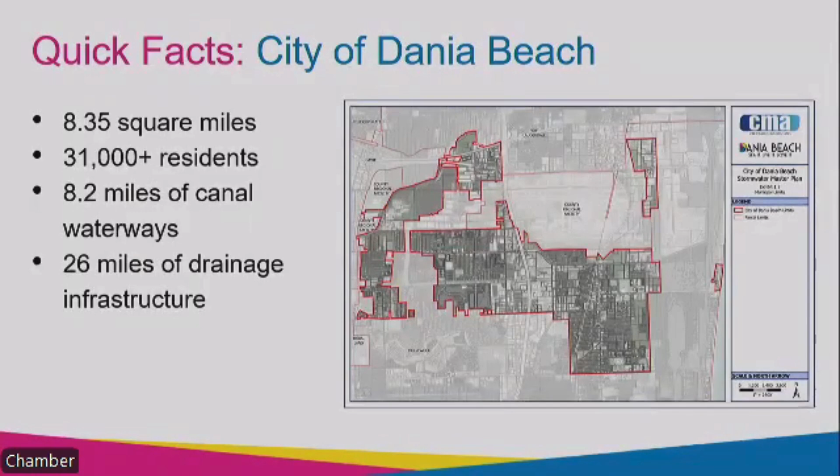So basically, how does stormwater work? We have rainfall that occurs. We'd ideally want it in a swale or retention area for storage. That's where we want the water stored, off of the roadways into the swales and storage areas that can infiltrate and percolate back down into the groundwater. From there, as it overtops those swales, it goes into the drainage inlets that ultimately connect to all of those canals we just talked about.

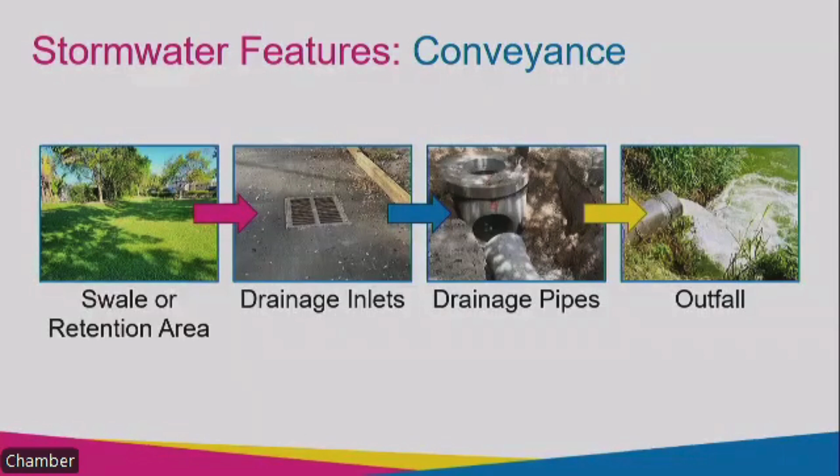So what are the stormwater constraints here for the city? We have aging infrastructure. This is the oldest city here in Broward County, so we have a lot of older pipes that aren't efficiently and effectively working, that could be collapsed, have debris in them, or just be really undersized. We also have low surface elevation—your roadways and how low-lying they are compared to canal elevations and groundwater elevations. The lower the surface, the less we can store. We can't create those swales and retention areas very deep because of the high groundwater table and low surface elevation. That's also a constraint, and what improvements we can do is limited by that low surface elevation.

And we also have sea level rise, I'm sure everyone's heard of. Because of all of those canal systems and how everything is interconnected tidally, as the high tide occurs, sea levels rise higher and could overtop some of the seawalls. So we're also limited on what we can discharge and how we can discharge to those canals when sea levels are higher.

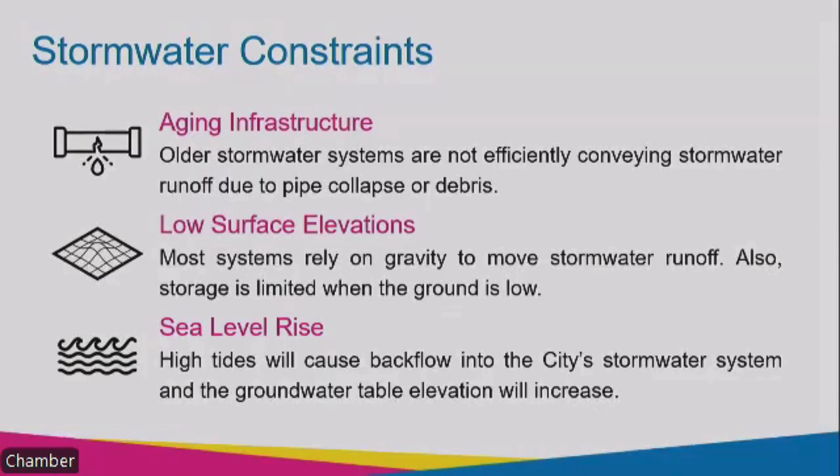So these are some constraints we have that we're aware of, that we're trying to address in some of these stormwater improvements that we're going to recommend.

So first off, we did a model. This is a stormwater model. Some of the steps that we took to prepare the model, we had to identify the topographic area.

This is basically just a snippet of one portion of the city that we're going to demonstrate in some of these exhibits, with US 1 on the left, Griffin to the north, Stirling to the south. But ultimately, this is the surface.

You see the higher areas, US 1, in that darker brown area. And then as you get to a lower green color, that's the lower lying elevation. So all of the surface topography is imported into the model.

And then we also have on the image to the right all of your pipe and how the system is interconnected for the drainage system. We already have a lot of that city-owned infrastructure, a lot of inlets, a lot of pipes, all the outfalls. So all of that is also imported into the model to see how the stormwater runoff is connected between all of the adjacent neighborhoods.

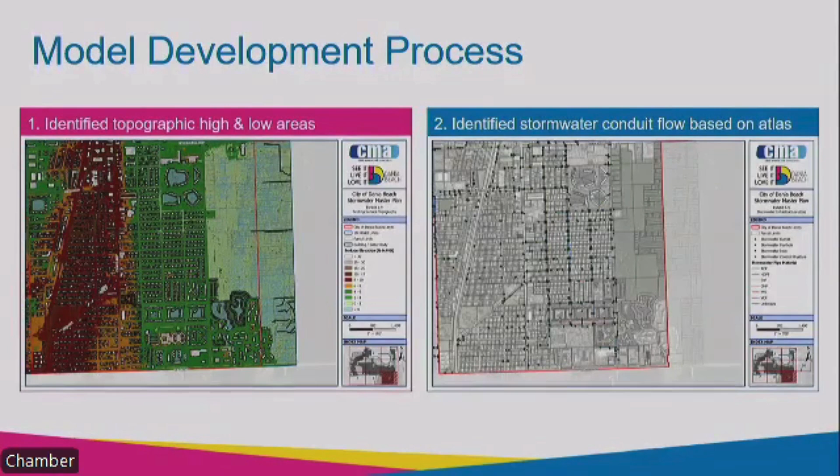So next we have image number 3. We delineate basins. Ultimately how all of those neighborhoods are connected are individual basins. So imagine its own little bowl, if you will. All of the rainfall that occurs in that basin will stay in that basin and only connect via pipes or over ground, over like a roadway per se.

So the image to the right is the nodal diagram, what's created in the model. You'll see a lot of little lines - those are all the links of how each of these basins are connected. We'll have pipe interconnection and we'll have the overland flow, basically a roadway, and all of those and how all of these basins are interconnected with all of these different links. Ultimately, that's the creation of a stormwater model.

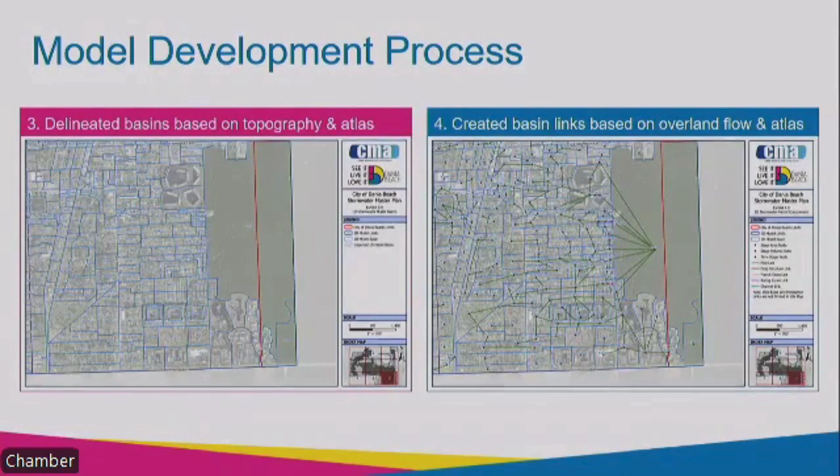So if I go back to this other image here, these are the different categories of how we prioritize that - the different vulnerability, is what we're calling it. So those red basins are the highest, showing exceeding 1 foot of flooding from a 10-year storm event. We're throwing 8 inches on it, but because it's the lowest lying area, there's actually more than 1 foot of flooding on those roadways.

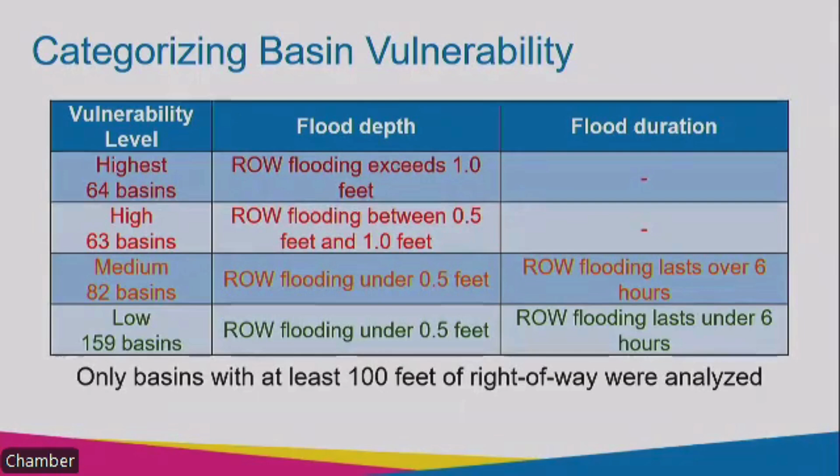It's also important to note, we only looked at city-owned right-of-way. So if it was county or state-owned or privately owned, we didn't analyze those basins and roadways under this analysis, because we're looking to see how we can implement stormwater projects with city funds and reduce the flooding in city-owned right-of-ways.

So knowing those different categories, the red basins are the highest, the orange are the highs. Those are the ones we tried to basically focus on - we need to make improvements, and those are the higher ranked vulnerability basins.

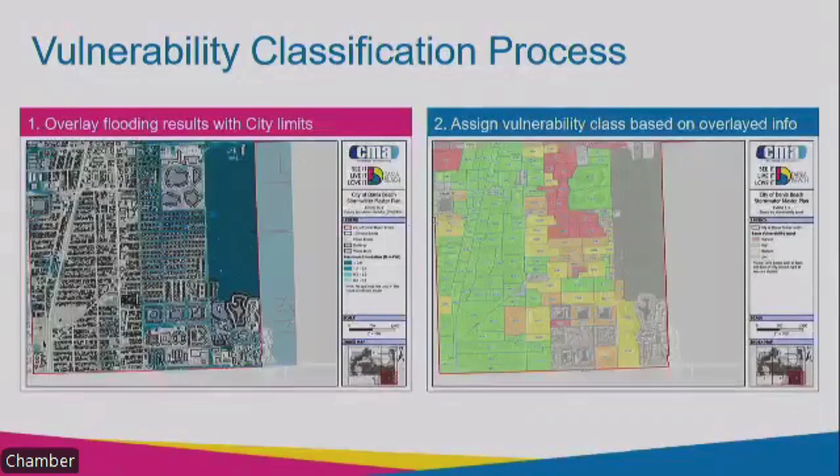So ultimately, this next step - this is kind of what we presented in the last presentation. We kind of got to this point. Now we're going to identify what capital improvement projects, what we can do to improve these 10 areas.

I also wanted to preface that it doesn't mean if you are not in these study areas that nothing's going to happen in your neighborhood. This is really just a start, a guide for the city. A lot of funding can come from having a stormwater master plan, so this is really just that first step to help the city get the funding and guide them on where to start working on some stormwater improvements. So if you're outside of this area, still be vocal, still let the city know your concerns. This is really based purely on the model results - streets that are very long, over 100 feet of roadway, flood over a foot, got identified with a higher priority.

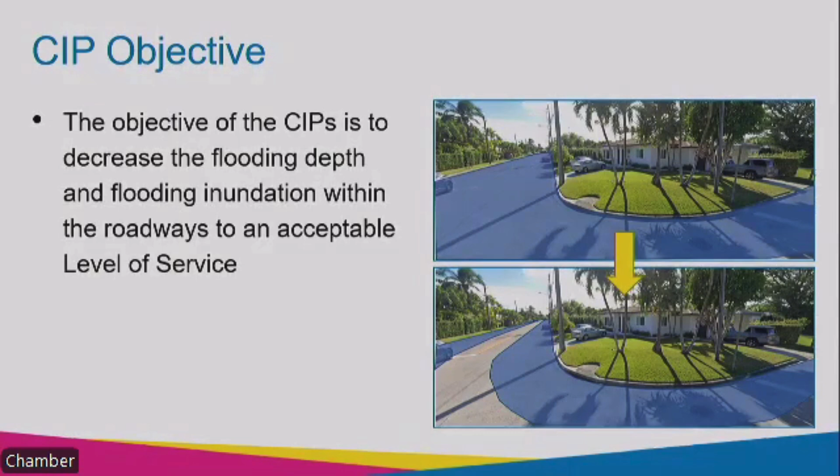Okay, so now that we know those are the study areas we want to look at, we're trying to analyze and identify what improvements can help the flooding in those areas. So ultimately, what is our objective? We want to decrease the flooding depth as well as the duration. So maybe I still have 6 inches of flooding, but instead of it flooding for 24 hours, it's only flooding for 2 hours. So a goal in looking at these different alternatives is getting the depth of flooding and duration to a more acceptable level of service.

Next, we looked at all of those different study areas, and we tried to identify a score for each to be able to rank all 10 of them. We looked at the depth over the right-of-way, the duration - how long it's flooding in that right-of-way and roadway - and then the length, so is it only flooded for 10 feet or is it flooded for 1,000 feet. That also was a component in this formula to score these different capital improvement projects. We also looked at observations the city gave us on flooding frequency, which helped guide us with that formula. Ultimately, this became the ranking of those 10 study areas.

So next, these are the different alternatives we looked at - let's say adding a new pipe, adding a pump station. I'm going to briefly walk through each of these things that we threw into the model for each of these 10 study areas, and at the end we identified what was the best result. Because ultimately, we want to make sure we invest the money correctly - we want to make sure we don't put in a pump station if it doesn't provide the best reduction of flooding.

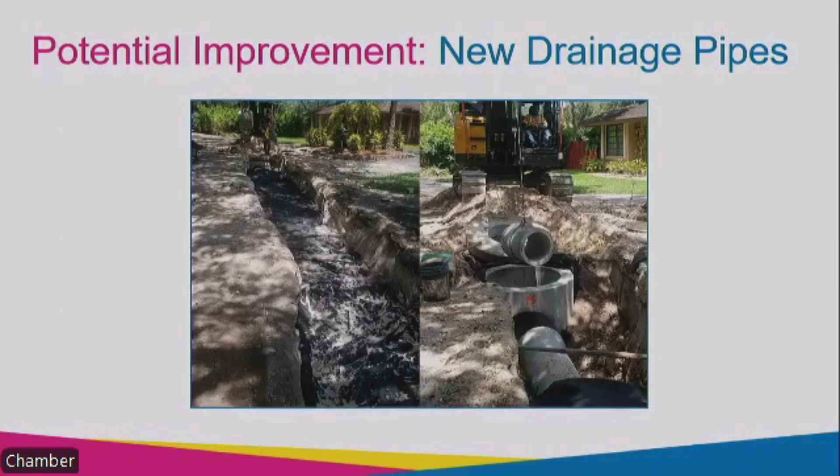So some of the things we looked at: a new drainage pipe. As we talked about in the beginning, the water's falling on the road, and we want to make sure we can guide it and direct it out to those canals, so piping is the best way to do that. We also looked at an exfiltration trench as a method - we'd have a perforated pipe that lets the water seep back down into the groundwater. This is a good candidate when our groundwater is a little bit lower than our pipe elevation.

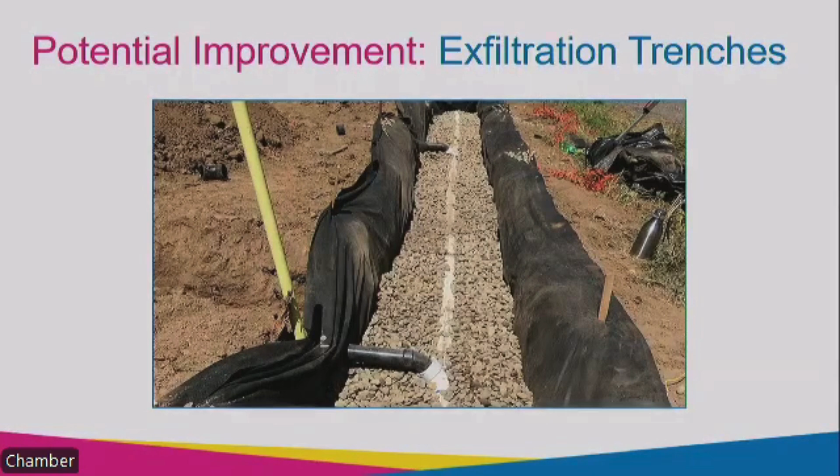We looked at backflow preventers. We talked about the canal and sea level rise. We want to make sure that as the canal is rising, water doesn't come back into our roadway. These items are called backflow preventers, installed at the outfall to make sure water doesn't come back up into the roadway.

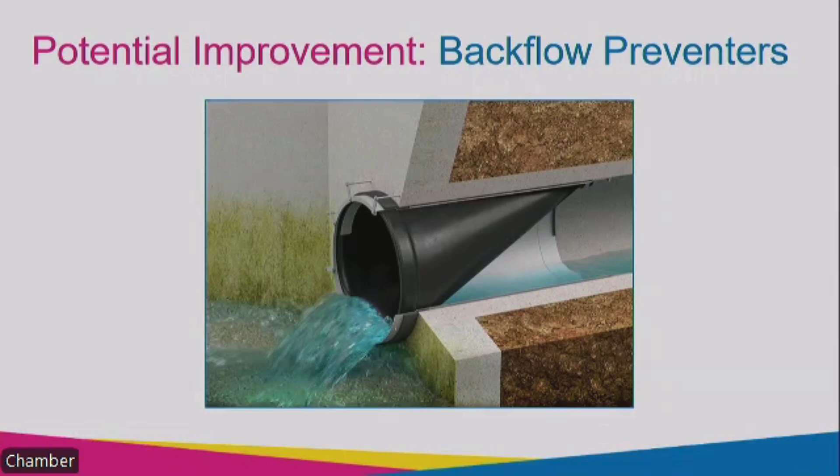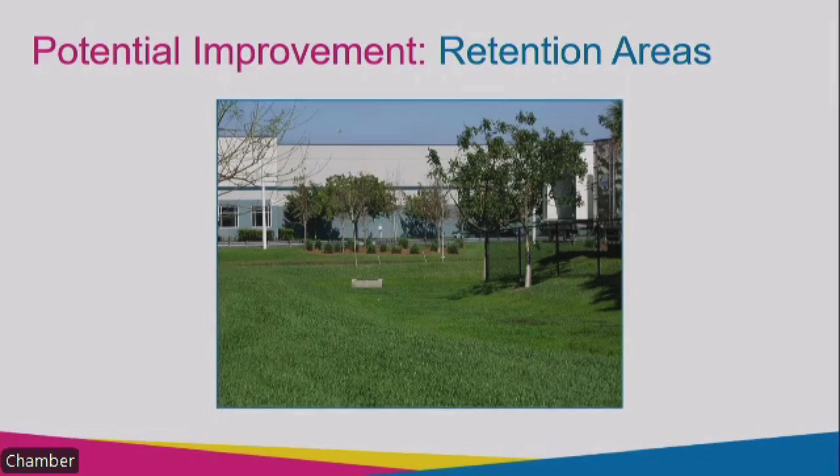The city's actually already been implementing and installing a lot of these at the outfalls, so we're including those in our model as a preferred option. We also talked about the benefit of retention areas and swales. If we can provide additional storage in some of these neighborhoods, that water can be stored and not all of it has to go out to the canals. So we recommended and analyzed some retention areas to provide more storage, water quality, help percolate back into groundwater, and once it fills up, we can discharge it to the canals.

Questions during, or should I wait till the end? You can go ahead.

I live at 325 11th Terrace, right across from Olson School. I don't know if you know that we have swales in the back of our condos. Are you familiar with those? Not off the top of my head, I'd have to look at a map. Okay, no problem, then I'll let it go.

Swales are very important because they provide additional storage. A lot of times residents don't like them—they fill up, get mosquitoes, and are hard to mow. But if we can capture that storage and runoff instead of everything being paved and all that water going to a canal, and try to percolate it back into the groundwater and provide additional storage before we run it off, that's less discharge to the canal. It's providing water quality. So there are definitely a lot of benefits to swales.

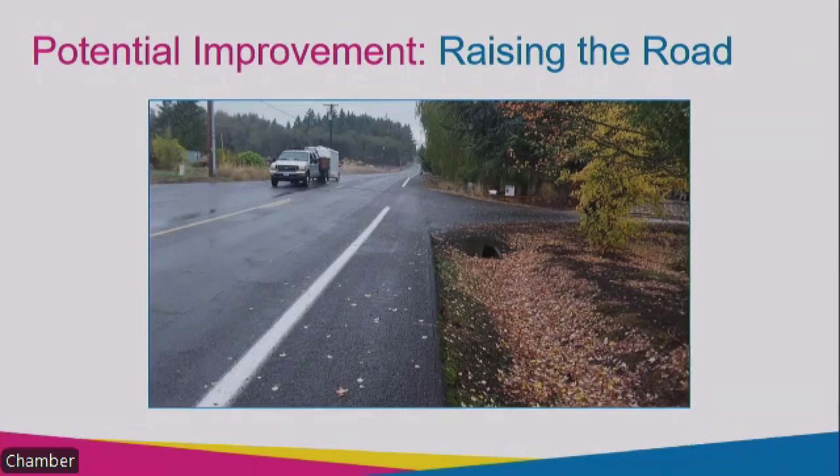Okay, let me finish wrapping this up, and then we can take more questions.

Pump stations is a big one, because as sea level rise occurs, we have those pipes to the canals, but if the sea level's high and our roadway's low, there's nowhere for the water to go. It's not going to go out unless it's pumped. It's got to be forced out.

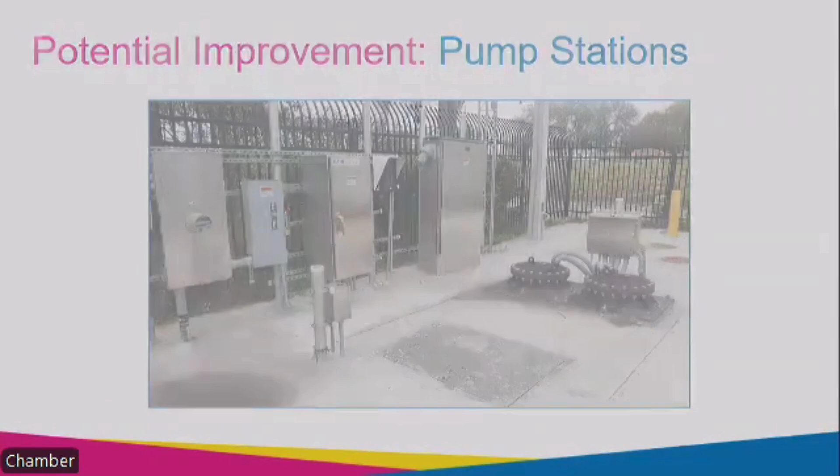So pump stations was another alternative we looked at. Drainage wells - this is a way to pump the water back down into the groundwater. This was a good candidate in certain locations.

And then raising the seawall. Obviously if the sea level rise gets so high that it's overtopping the seawall, no matter what size pump station you put in, the water is just going to keep overtopping the seawall. So there are some locations where we would recommend raising the seawalls. That's going to be a long-term phase, because a lot of the seawalls in these areas are owned by private residents. So we're looking at policies and codes and trying to look for grants to help the residents in raising those seawalls. That's definitely an alternative that we looked at.

Okay, so our first CIP area - this is off of Griffin Road out west, just before 441. This is one of the neighborhoods where we grouped these basins together, and we looked at what we're calling CIPs, capital improvement projects. So we're recommending - if you could kind of see, I know it's a little hard to see - the green dots and lines are existing infrastructure, and the purplish pink color is all proposed.

Also, on 34th Terrace, there's an upcoming project, so we did include that in the model as existing infrastructure, just because it's planned in the near future. But ultimately, this is what we're proposing: gravity pipes. That backflow preventer is what we talked about at the outfall - we don't want the water to come back up into the city roads.

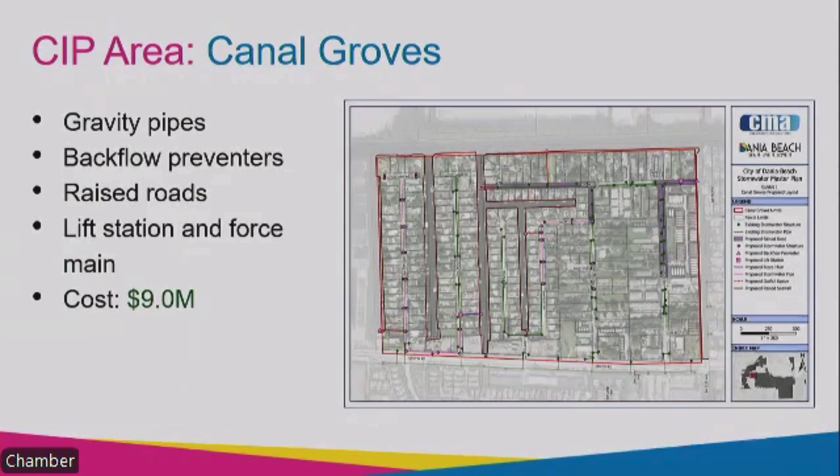Number 2, this is south of Griffin - between south of Griffin and east of State Road 7. You have Southwest 40th over there, and Lake George at the top. There are some projects going on here that the city has. So we're just trying to interconnect those existing projects and really trying to get everything to flow into Lake George to discharge out of the residential neighborhoods here.

Again, gravity pipes, those backflow preventers, exfiltration trench is a good candidate in some of those - that's where the pipe will be perforated and allow the water to get back into the groundwater. Again, the lift stations - this one's just over $15 million, and the price tag obviously is bigger the bigger the size of the area we need to cover. We need to pipe a lot of this, all the city right of way, and get it to the outfall, which would be Lake George, which is interconnected under Griffin Road to the Dania Cutoff Canal.

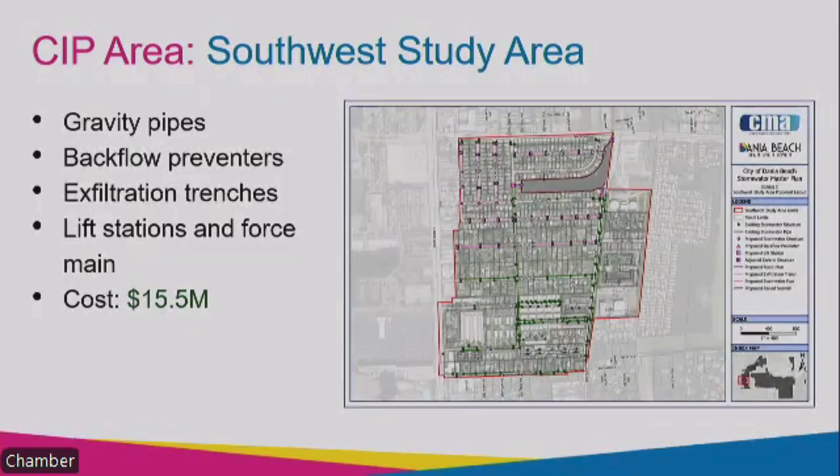Number 3, we have up to the north, more off of 84 and Ravenswood. We have a couple roadways here that have some heavy flooding and really no outlet. There's no interconnectivity for where it can go. It's more industrial over in this area, but it was categorized high just because of that length of roadway and depth of flooding, so this was still categorized as a study area. So we have gravity pipes, raised roads, and again those pump stations. This one's costing 7.2 million.

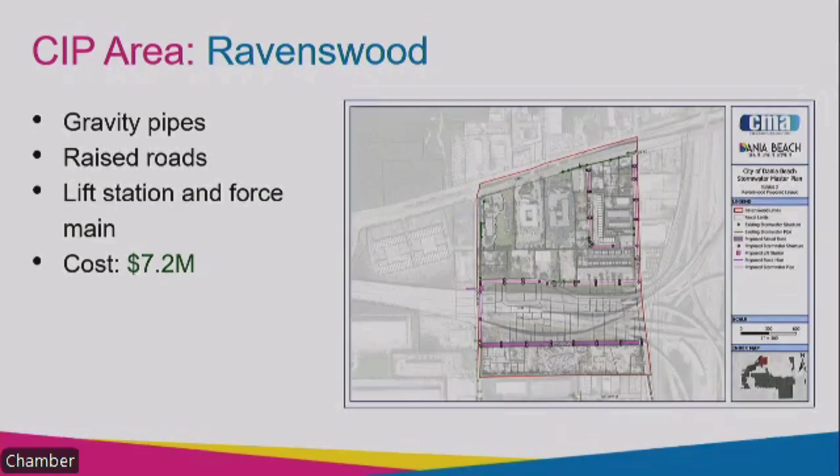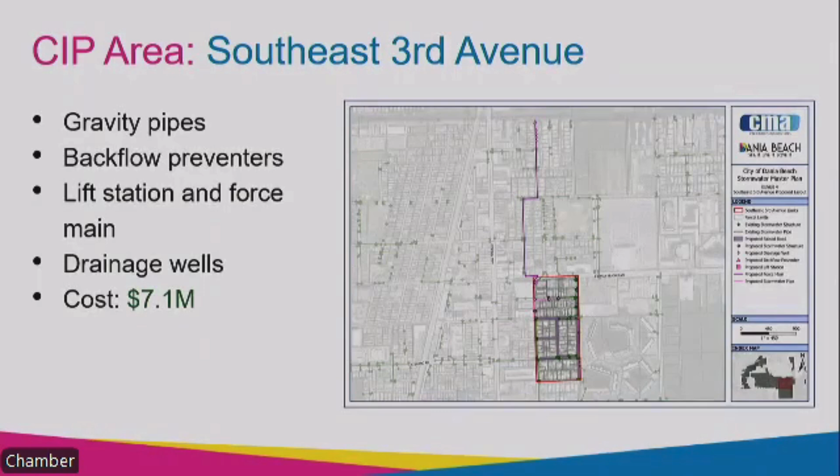This one's Southeast 3rd Avenue, south of Dania Beach Boulevard. That rectangle area you see is south of Dania Beach Boulevard and east of US 1. This is adjacent to another city project, the Southeast Neighborhood Project, so this is just north of it. We're trying to collect it all. There's really no canal system nearby, so our plan would be to pump everything north to the Dania Cutoff Canal, collect all of that water there, and discharge it to the canal. We have gravity pipes, backflow preventers, a lift station, and drainage wells. This one's 7 million.

This one we're calling College Homesites. Towards the bottom, the east-west corridor is Sterling Road, and the corridor all the way to the right is US 1, so that's where this one's located. This one's also kind of like a bowl, so all of this water really doesn't have anywhere to go. US 1 is a little higher, and then you have the canal to the west there. So we really just need to capture all of that and pump everything to the canal. We're recommending gravity pipes, backflow preventers, raised roads. This one will have some FDOT connection onto Sterling Road, again those pump stations and drainage wells.

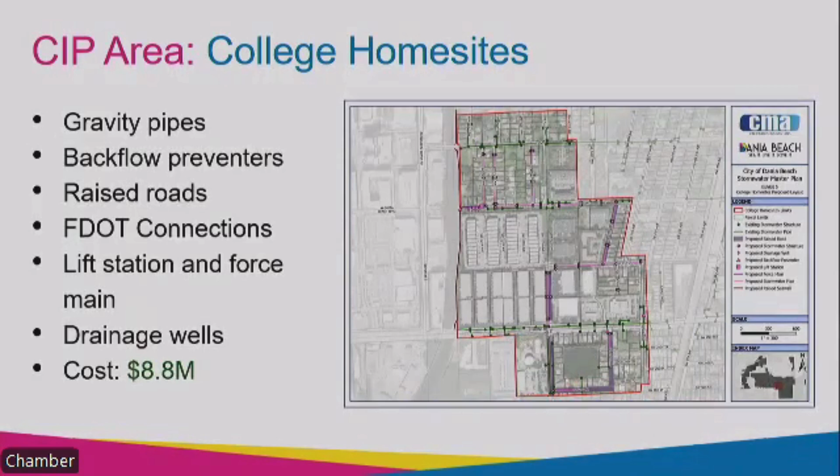Davis Isles is north of Griffin, almost all the way to 441, just east of 441. This one is a smaller one, but it still observes a lot of flooding, so it's still triggered in our formula. We recommend additional gravity pipes, backflow preventers, and again we need to pump that water out. This is just low lying, so no matter how many big pipes we have, the canal water is going to be too high when the sea level rise occurs, and the water can't get out. So we need to add those pump stations. This one's costing 4 million.

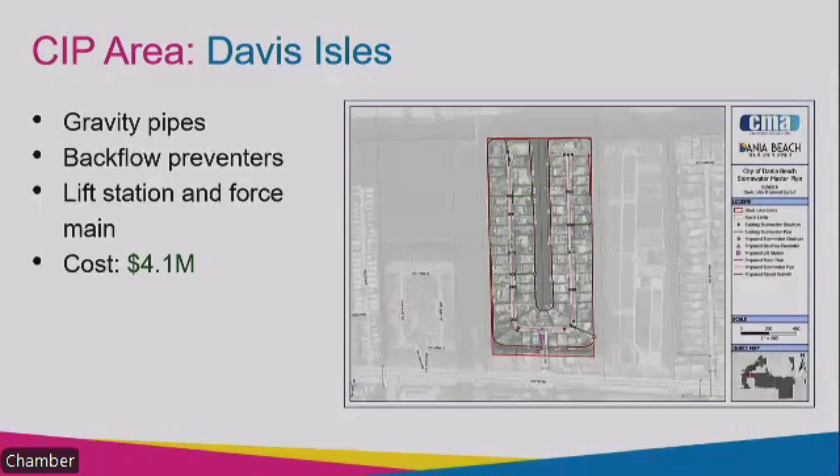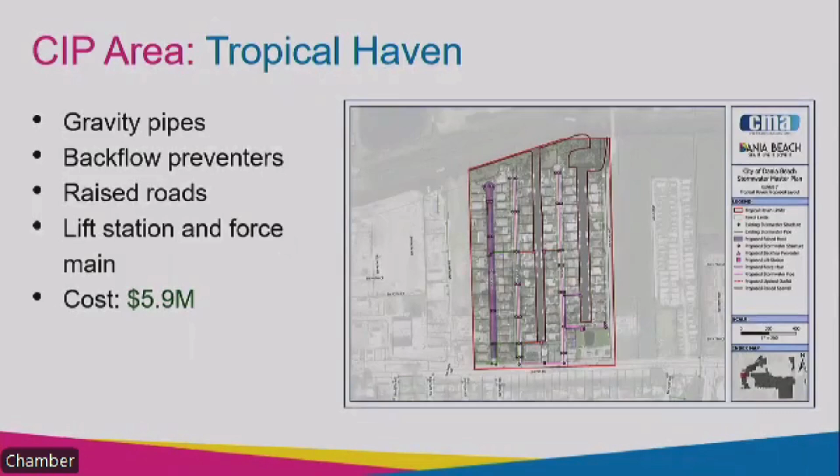Next one, Royal Palm Vista. This one is adjacent to Dania Beach Boulevard—actually just adjacent to the prior one we just looked at, just to the east of it. So again, very similar scenario. We don't want to flood Dania Beach Boulevard, so we need to pump that water north out of this neighborhood. So additional pipe interconnections, backflow preventers, raised roads, pump stations, and drainage wells, just under 9 million here.

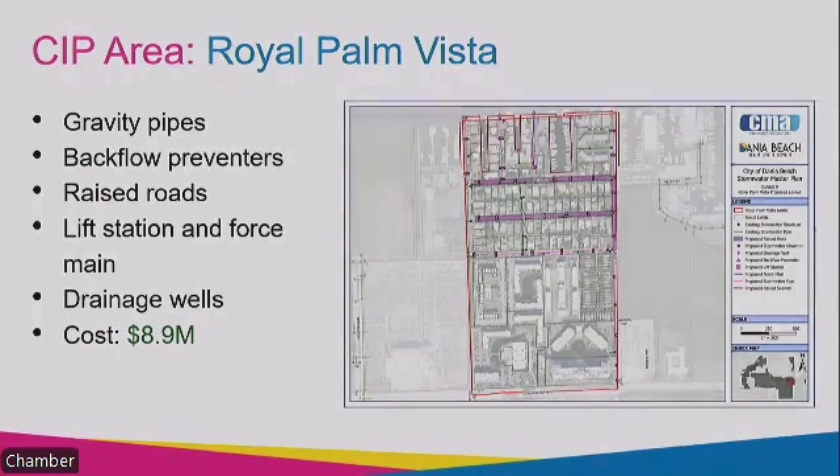And I think the last one on our list, Melaleuca Gardens. So this one is just north. You see the Dania Beach, the Dania Cutoff Canal kind of on the bottom there, curving, and we have Griffin Road to the north. So again, lots of little finger inlets, so we really have all these little bowls, if you will, for all these basins. We really need to get the water collected and pump it out. So again, just the gravity pipes, the backflow preventers, exfiltration trench where we can, where the water table and the roadway is a little higher, raising the roads, lift stations, and the drainage wells.

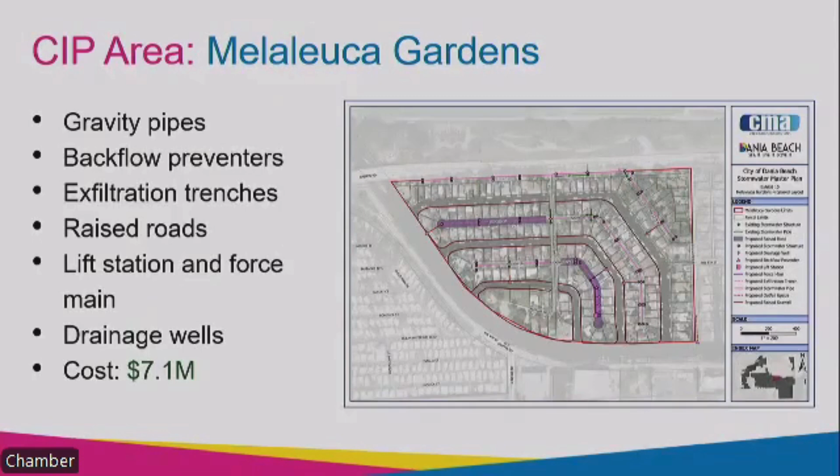This one's costing 7 million. So in summary, those are basically what we modeled. We modeled a lot of different alternatives, but those were the best results that we could reduce the flooding depth, duration, and provide the best result to the city and to the residents. So in summary, those are the 10 we briefly went through. As you know, any questions we can dive in further.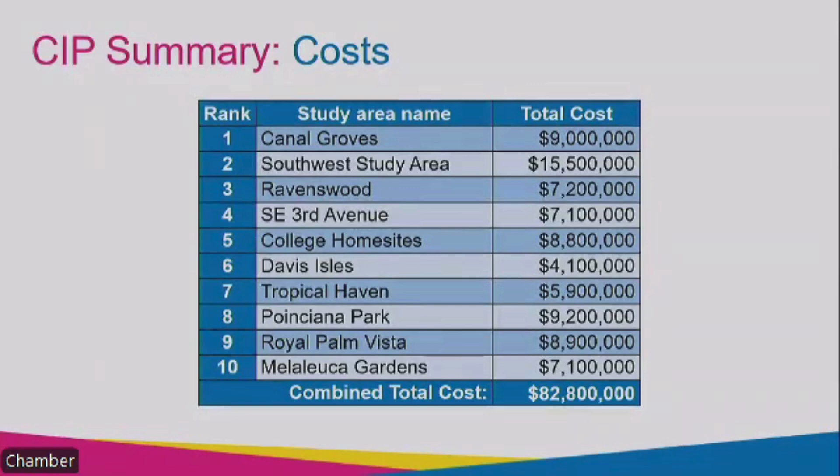This is the total cost for everything. But like I said, we're going to take this and really look for grants, look for that funding, which really is our next step. So this is kind of where we are right now in our project. I did want to highlight some additional improvements that we could do outside of these 10 study areas. We're going to recommend and then kind of work with the city elsewhere.

So maybe a possible swale program. We talked about how important swales are, so maybe we can look at installing a swale program wherever we can capture water off of the roadway into these swales. We're going to try to implement that. Tree wells, like some of these next few features, are good. If there's developments coming through, we can work with the developers and encourage them to use certain features that we're going to call a low impact development, so that maybe they can implement these to help with the runoff on the city road. Maybe that development can take some of that runoff between the tree wells.

Surface filters could be like a permeable pavement. Underground storage chambers, that's usually on the private side, that's another option. I know a resident talked about previously stormwater parks. It wasn't viewed in any of these particular areas, but we are recommending, if the city does have park improvements coming in the near future, that's something that maybe they can implement and investigate if that's a good feature that can be used for those parks.

And I know another resident previously talked about canal dredging, so we do recommend the next item: agency coordination. So the city should still work with the county, FDOT, South Florida Water Management District, who owns the canals. The Army Corps also permits and oversees the canals and a lot of the pump stations in the canal system. So working with those to see what improvements can be done between canal dredging or monitoring the pumps, how much flow is traveling to our canals from the upstream cities. The city is actively working with a lot of these agencies already, but we're just noting these improvements can still occur in the future between that coordination.

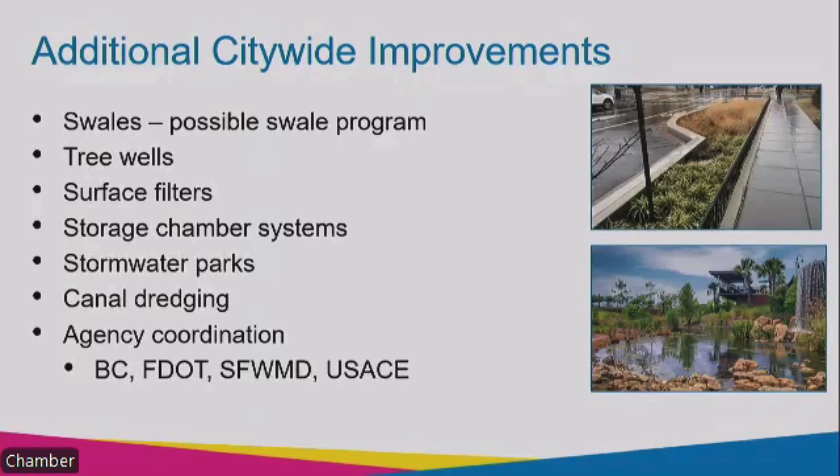And I guess what I was talking about previously, that's what's next. So first off, we do have a general guide that's going to summarize some of this, but really just look at, for the residents, what is stormwater? What can you do to help? What are we looking for? Just a general guide. We were hoping to distribute it today, but it's just not quite ready, so it will be coming out very soon, and we'll be throwing that on the city's website.

And then obviously we talked about that funding, so that is our next step: finding that funding plan. How are we going to pay for all of this? We've got to look at reviewing the city's current stormwater utility fee, see if any improvements need to be done there. We've got to look at their current operation and maintenance costs. How much do they currently spend? How much are they going to need to maintain these future systems? So we're going to look at a lot of that and create that funding plan moving forward for the city. And we're also looking at policy reviews.

For example, I mentioned previously that low impact development. If we could work with the adjacent neighboring developments and encourage them to use certain features that may help with infiltration, so it doesn't just discharge all to city right away or canals. If we can infiltrate a lot of that stormwater and manage it effectively, that'll help with how much is flowing into the cities and adjacent neighborhoods.

Yes, sorry, I don't have that memorized, let me jump back. I think that's part of one of our CIPs—let me jump back to Poinciana. Sorry, I don't have every street memorized here, but yes, I believe that is very close to this neighborhood, so that will be part of a future CIP project area.

To let you guys know, just a handful of us probably represent 1,800 people in Meadowbrook alone. It's not that they're all here, but they're not aware of a lot of things. We don't get flyers, we don't get notices, we don't get anything.

This isn't about a current active project. That's why I said previously, not to say it's excluded, but we didn't look at it because there's already a city project planned in this neighborhood. Knowing that they're already investing a lot of money in that location, we were trying to identify other locations throughout the city that need improvements.

So what we're talking about is not in that plan because it's already handled. Correct, there's already another city project. We're looking at the future - what other projects can we look at because this other project was already occurring, and they're responsible for it.

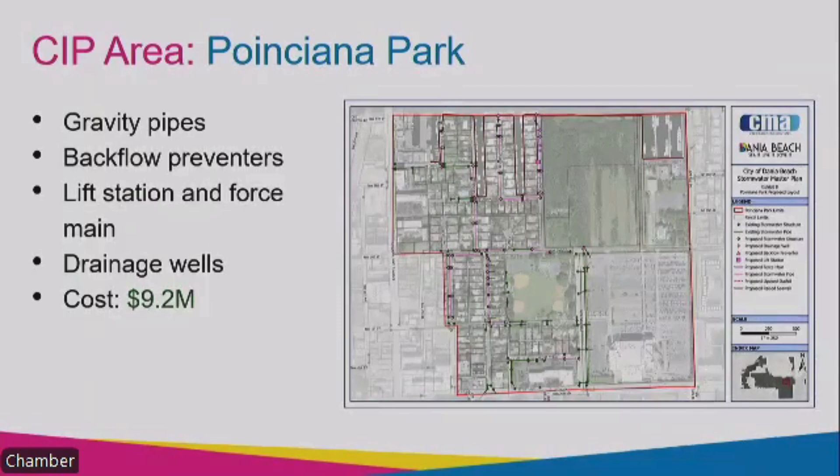I just want to check to see if that street is included in this master plan, or I assume I have to check also with the city, with the engineer, with the team to ask them. But in this specific master plan, I do not believe that is - I'm trying to go back to my overall map here, give me a second. I do not believe that is in our area.

So what you present tonight, is it a plan that's gonna be done, but there are other projects that are running right now? Correct, so this is - like I said, we did a model of the whole city and we're trying to prioritize where the heaviest amount of flooding, the longest time that it floods, the length of the roads, which neighborhoods are the most vulnerable.

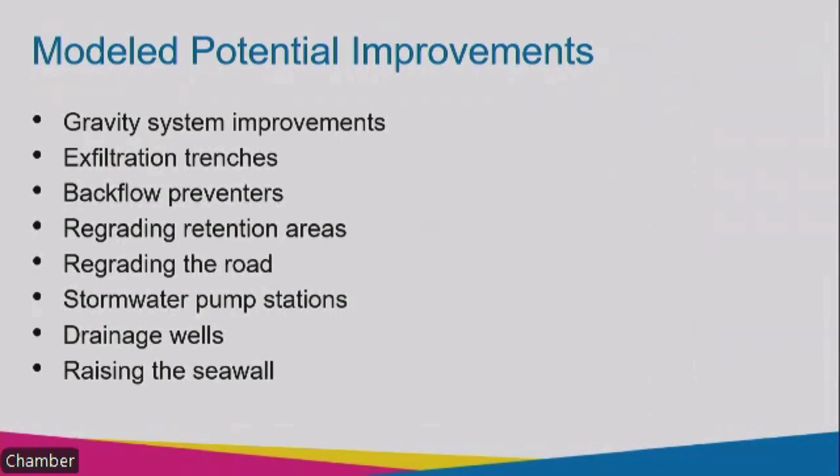So my specific area, yours doesn't flood, it was just maybe not triggered as the highest level, but we do encourage you to still voice your concerns. And we could still work with the city to see - there might be some isolated cases where we could just do some smaller projects in the near future.

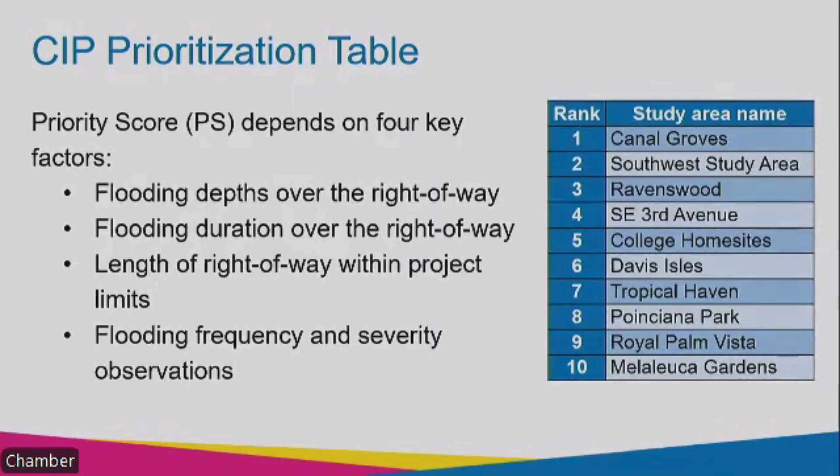So in this case, I have to address the city, and then they can do something, or you as one of the future companies that they're gonna work with - or how does it work?

Yeah, so I would let us know your concern, we'll collect everything, give it to the city, and let them know there are other concerns beyond what's in our plan, and just see what they can do. If there's maybe an isolated case, you could just add a few pipes - it can be a much smaller dollar figure.

Okay, and maybe so there's something - my last question is, who do I address to the city? Which department or which person can I get a business card from, or where to come and ask? I was here for permitting, so I asked, but of course it's a daily routine, so the lady didn't know how to help me. If it's a specific department, a specific name that I can come and address my situation.

Because I'm not in that big of a mess, but I have the bad experience, same like you guys. I'm just one house, and it wasn't that bad before they built the new community in the back of Tropical Haven.